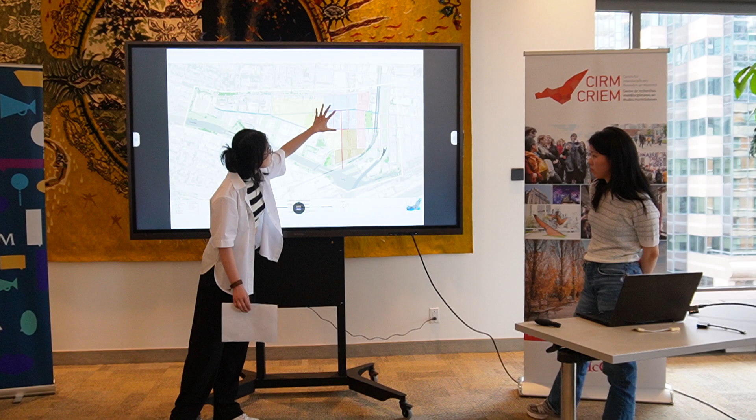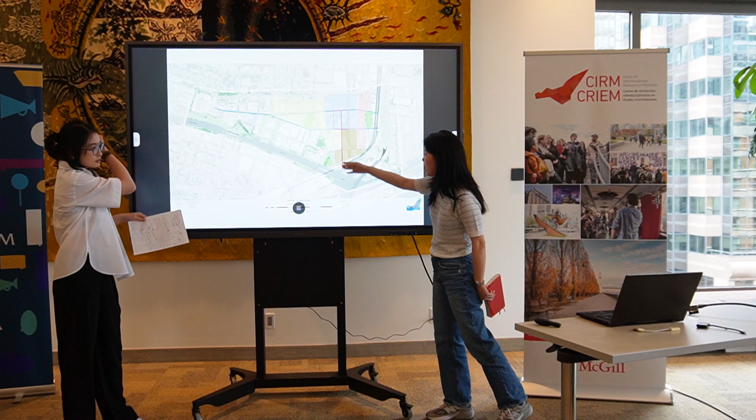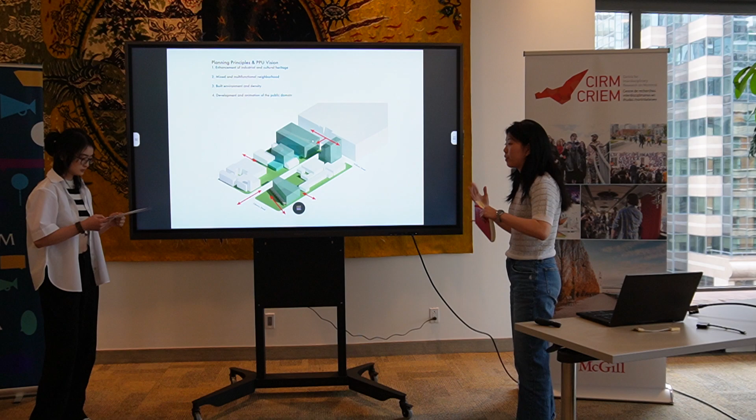And then we found the sub-routes in the middle of the zone, very interesting because it's directly hitting the Lachine Canal. Right now, the axis linking to the canal in this area is hard to notice. So as our intervention, we decided to choose this sub-street between Ottawa and William as our zone of intervention.

This is the ETS school, and the white buildings are all the existing buildings. We thought this was an interesting area to start with because it was surrounded by all these different sectors of Griffintown that we want to bring together.

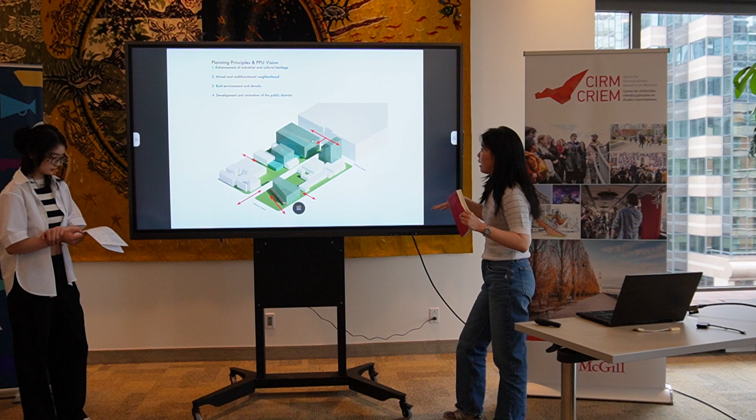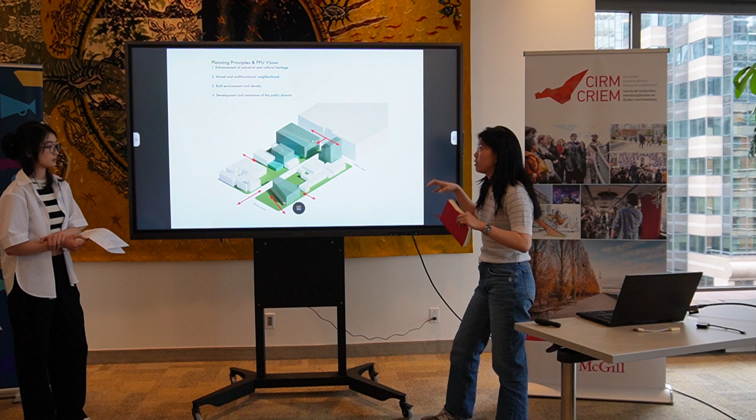So our proposal is to basically turn this part of the street into a pedestrian-only street, and this would allow us to also play with the modulation of buildings and densify this area while also retaining the cultural aspect of the neighborhood. So we're seeing this pedestrian-only street as a cultural walk.

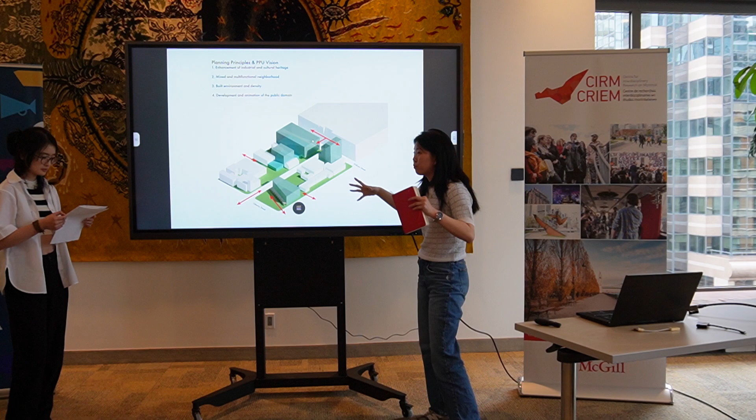Through the street, our proposal also responds to all four of the principles because we also played with adding density to the buildings, proposing possible shapes and forms of the buildings, and how to add height while still inviting people in.

For example, on this side of the road, which has a maximum COS of 9, by playing with the setbacks of the building, we managed to create a form that has a COS of 8.5. This one is a proposal for a building with a COS of 5.8, and the maximum COS for this part of the street was 6.

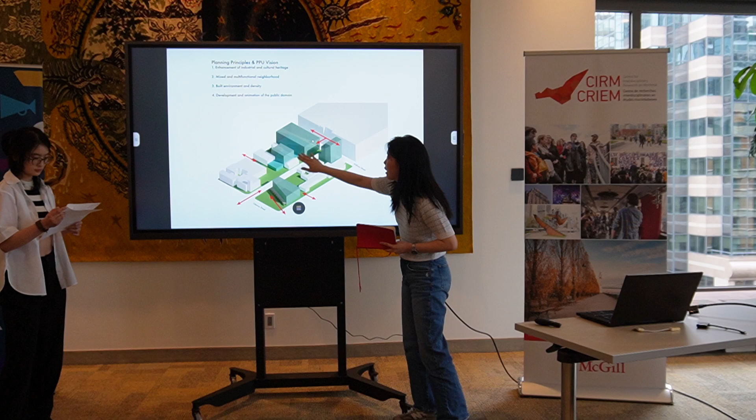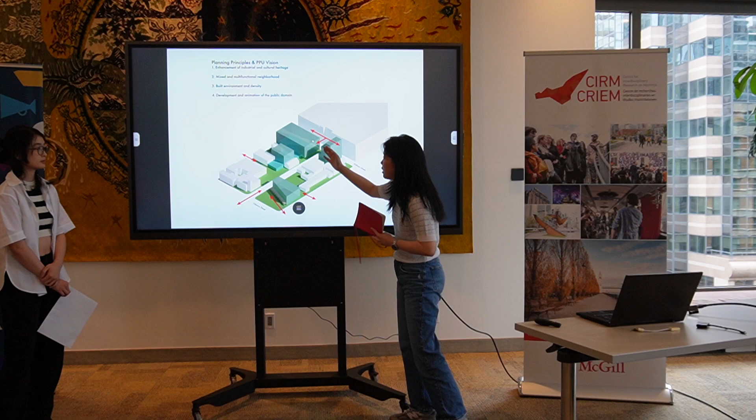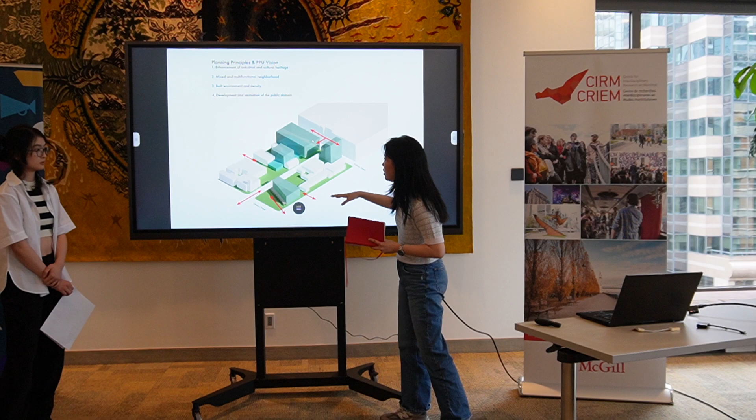So here, as I said, we're playing with the setbacks, but here we are also playing with setting back the ground floor and having the upper volumes cantilever to basically create this movement through the street and beyond it, playing with the shapes and volumes of the new buildings too. We're allowing this porous interaction and link with the other parts of the neighborhood.

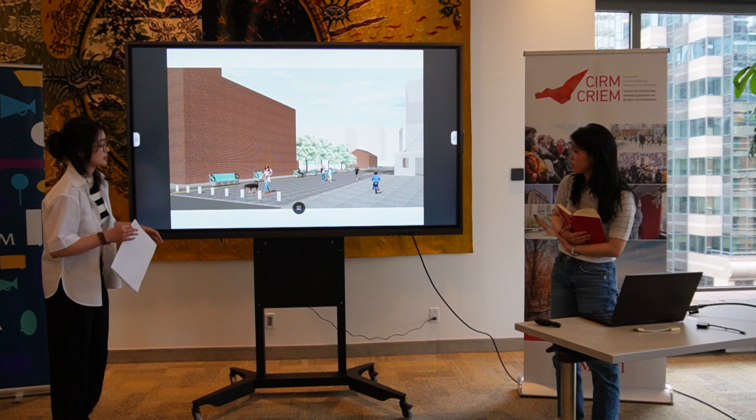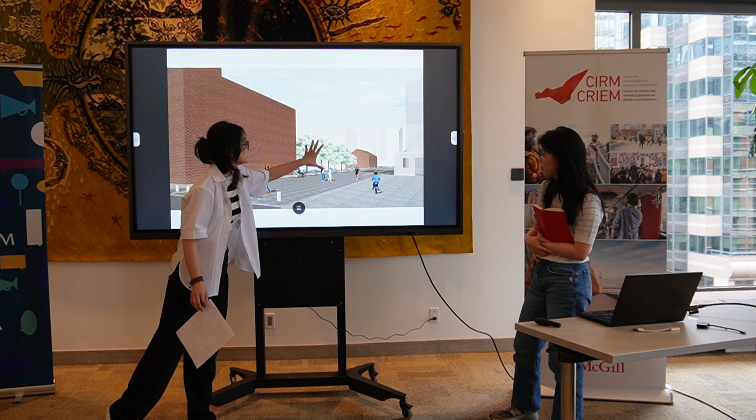So this is the specific design that we're proposing on the pedestrian-only street. As I mentioned, there's going to be a MR-63 pavilion located here, and this is the old fire station, the old two-story historical building, and the PPU is adding another pavilion to the school.

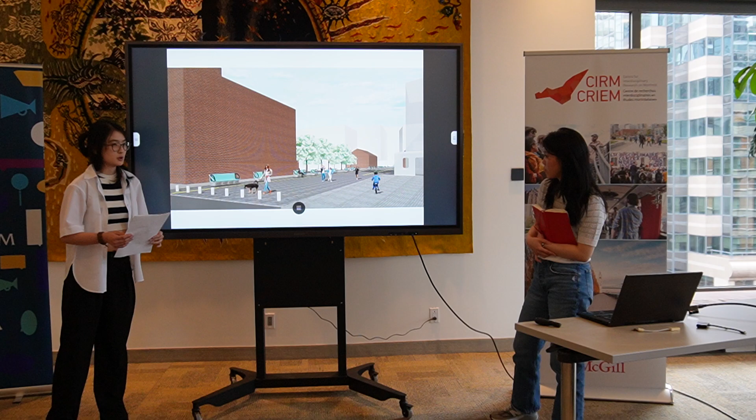So what we're trying to do is bring some theme to the pedestrian-only street. As you can see, we're using the old Metro seats and the yellow warning sign that makes people feel like they're walking on a metro. People on either side of the pedestrian street were wondering what's going on, and that invites them in.